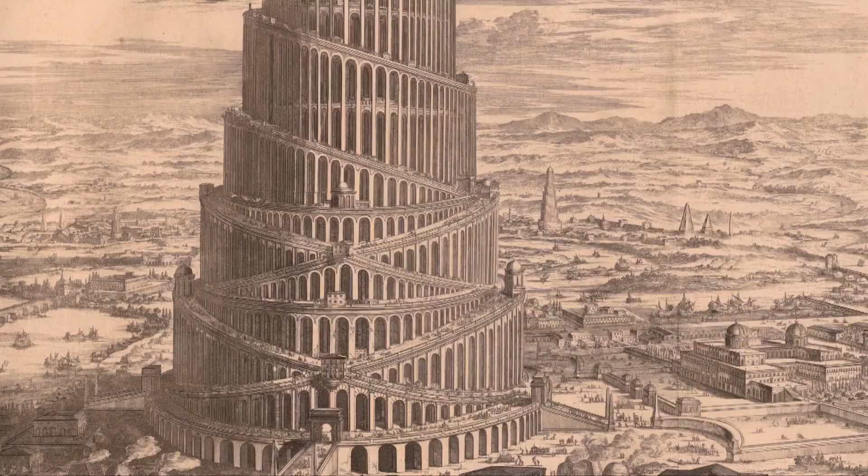Today, the world has 3 mega skyscrapers reaching over 600 meters, physical representations of man's eternal desire to conquer the sky. From the Tower of Babel to the Burj Khalifa in Dubai, the creation of high-rise constructions has been unceasing.

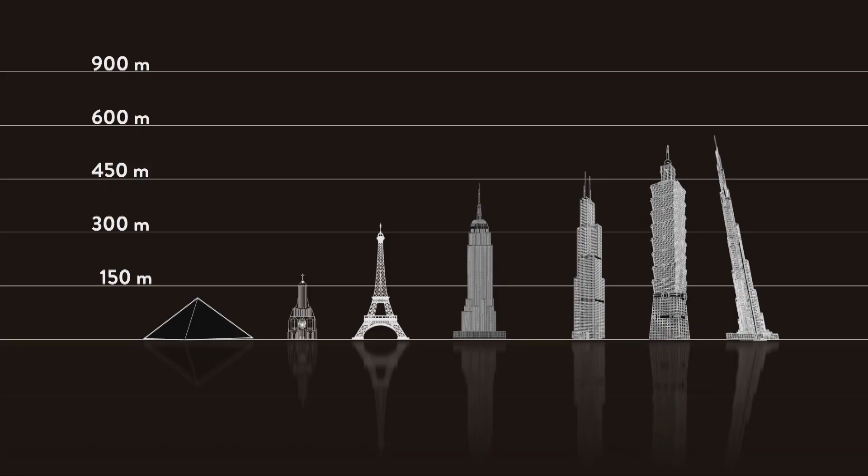Richard Taillé is a physicist. He went around the world to research the subject, asking the expertise of engineers and scientists driven by their desire to reach for the sky. How were the Egyptians able to build pyramids that dominated the world for nearly 4 millennia? What were the methods of cathedral builders? How did engineers make use of scientific models to design emblematic monuments?

Richard Taillé takes us on a vertical journey in the footsteps of those who set out to conquer the sky. To understand how over the centuries men have been able to defy and then master the laws of physics as they build higher and higher. His investigation of man's race for elevation took Richard Taillé to Egypt.

At the edge of Cairo, on the Giza Plateau, stand the pyramids. The Pyramid of Khufu, the largest, remained the tallest structure in the world for nearly 4 millennia. What expertise was available to the Egyptians when they built these monuments? It's a mystery that continues to fascinate scientists and Egyptologists such as Pierre Tallet. With him, Richard Taillé visited the pyramids, the last remaining monument of the 7 wonders of the world.

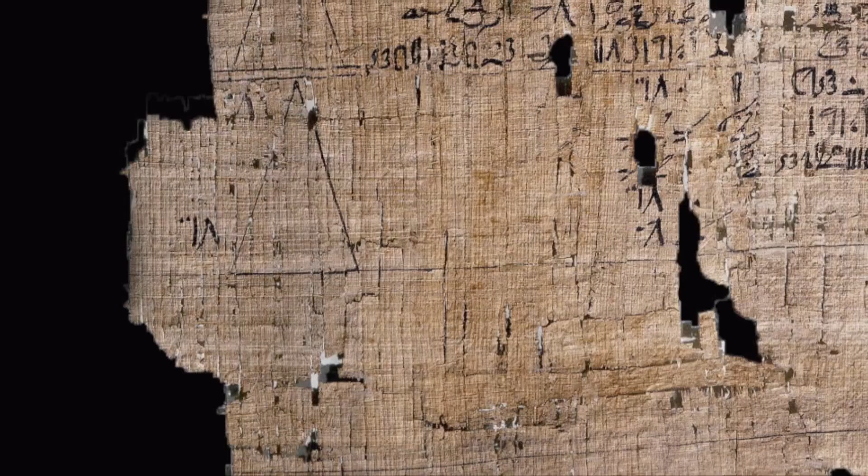Thanks to the Rhind papyrus, we understand how the Egyptians were able to build the pyramids so that their slopes were identical. We know that the Egyptians had the idea of proportion and used a small triangle. Using that small triangle told them where to place the next stone. The small triangle and the pyramid were similar triangles, as we say today. And this similarity is found in all of the pyramid slopes.

How can we not wonder what methods were used to build these colossal stone constructions? From the foot of the pyramid, we can really see the blocks. I mean, they're huge. People have an image in their head of armies of slaves working on the pyramids. Is this impression correct? Not really. Certain films have popularized the idea of slave people working on pyramids. Nothing is further from reality.

The more documents we find, the more we realize that the work was remarkably well organized by the Egyptian monarchy, and that the workers were craftsmen chosen by the king. They were well fed, well paid, and employed on a yearly basis for their skills. And according to the American archaeologist Mark Lehner, since it took 2.3 million blocks to build the Pyramid of Khufu, we can estimate that they made an average of 350 blocks a day over the 27 years of Khufu's reign.

A team of 800 men is capable, over such a long period, 27 years, of carving all the blocks that made up the pyramid. By making these extrapolations, we've concluded that a team of about 5,000 at the most would have been perfectly sufficient to construct the entire building. Okay, that's still quite a large team.

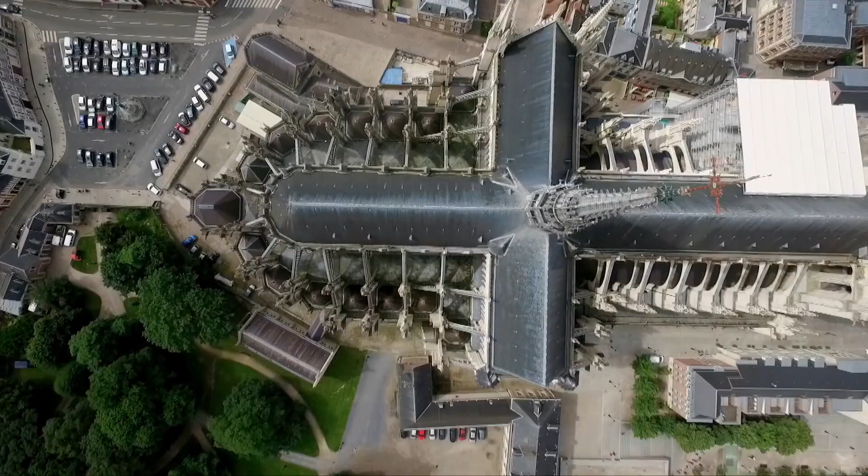Notre-Dame d'Amiens was a wildly ambitious project, unrivaled at the time. One that holds great fascination for Richard Taillé. As a physicist, when I see the columns, the mass that is above us, I try to reason in terms of force and mechanics. But I imagine that in the 13th century, these notions were not very well known. Exactly what kind of theoretical tools did they have at the time for constructing these cathedrals? In terms of theoretical tools, they didn't have much. Mastery of the compass, the set square, the ruler, very good drafting methods, and the right materials. They used the right stone in the right place.

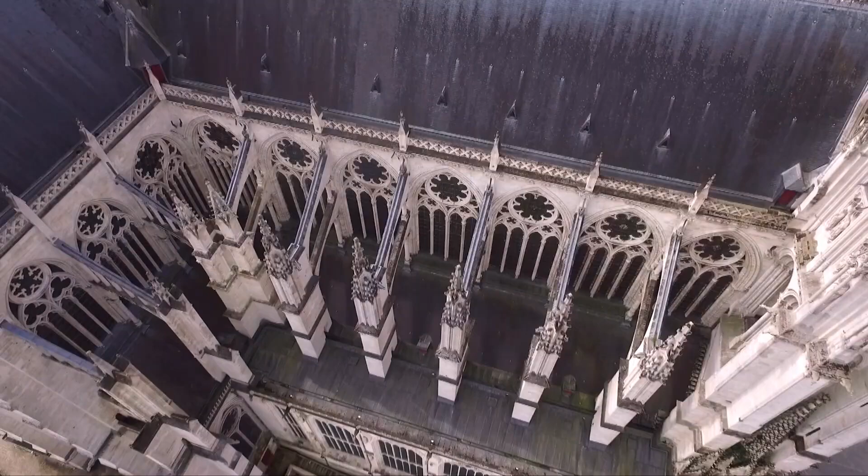Empirically? Very empirically. Just by weighing a stone, they knew its density. And they put the heaviest stones on the bottom, the lighter ones on the top. When we make sophisticated calculations today, we realize that these structures are oversized from today's viewpoint because they didn't calculate the size at all. But pillars like this could bear maybe 20 or 30 times the load they currently carry. Few or no theoretical tools. As for the construction tools like the plumb line or the arithmetic rope, they remain astonishingly simple in light of the scale and the complexity of these stone constructions.

Well, let's try one of these so-called rudimentary tools. We're going to make a right angle with this rope that has 13 knots. 13 knots. We're going to make a triangle with one side, that's 3 units, 1, 2, 3. 4 units here, 1, 2, 3, 4. So if we calculate this on paper using geometry, a triangle with these proportions should have a right angle here. It's the Pythagorean theorem, but the medieval constructors didn't know this theorem. However, they knew that when a triangle has one side that's 3 units, another 4, and another 5, it's a right triangle. So that gives us a right angle.

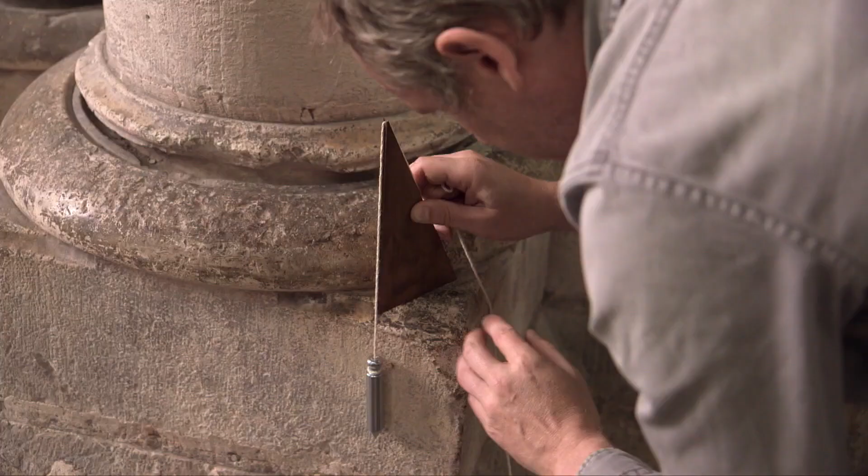And it can also help to make horizontal lines. If the vertical line here is aligned with this side, it means that the bottom is horizontal. Yes. Let's try. I'm a little intimidated. It's my first time using this medieval tool. Here we go. I'm putting it on the surface. And yes, it's horizontal. It's remarkable. So I tested the horizontality of this part of the cathedral. The builders did a good job. We can see that they managed to build something massive and durable using a relatively simple tool. And that 800 years later, with maintenance, it has remained sound.

But not all cathedrals have been so lucky. A few kilometers away, Saint-Pierre-de-Beauvais has had a turbulent history. It should have been the highest cathedral in the world, but the builders' plans were foiled by the laws of physics, leaving it unfinished. Jean-Lucien Guenon is the heritage officer who watches over it today.

So we're entering the cathedral at what should have been the main entrance if the nave had been built. And we can see the size of the aisle and the choir with its Gothic architecture in front of us. The Bishop of Beauvais, who decided to rebuild the cathedral in 1225, wanted it to be the most magnificent, tallest, and largest cathedral in Christendom. So the vault is 48 meters 50 high, the tallest vault ever built.

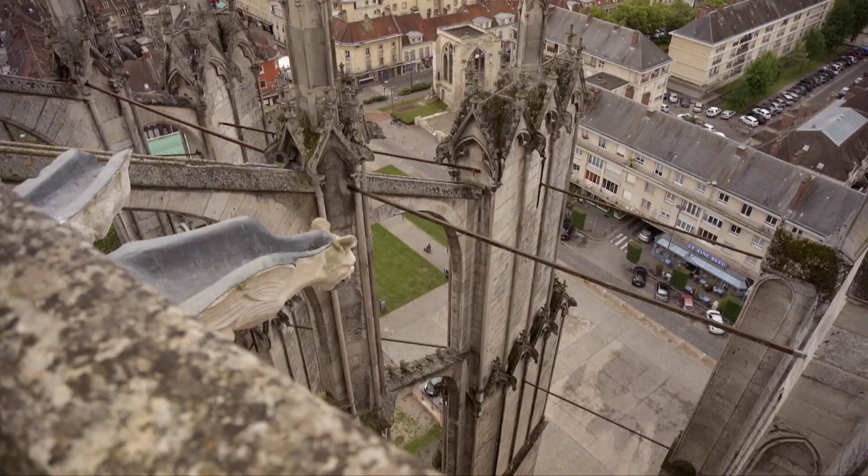At the time, Saint-Pierre-de-Beauvais benefited from advanced technology. It was reinforced with iron. Its arches were supported and bound together with metal tie rods, but this precaution would prove insufficient.

The choir suffered some unforeseen events. It was completed in 1270, after 50 years of construction. And in 1284, some external flying buttresses broke, causing certain arches to fall. It didn't completely collapse, but nevertheless, as a precaution, the reconstruction included a new column in each span.

And that's why it's a very small space. So 3 new columns were added, in between the 13th century columns. All right. Each arch is therefore divided in 2 and supported by an additional column.

We're going to see the upper parts of the church now and look at the tie rods more closely. The stairs are very steep. Here we are. Okay.

We have a good view here of the cathedral's 13th century architecture and the differences between the original structure and the reconstruction that took place in the 14th century. So we can see this buttress column that is very streamlined, but has a large surface area for the wind. And then a column here in a cruciform shape that's a little less wide but offers protection in this direction.

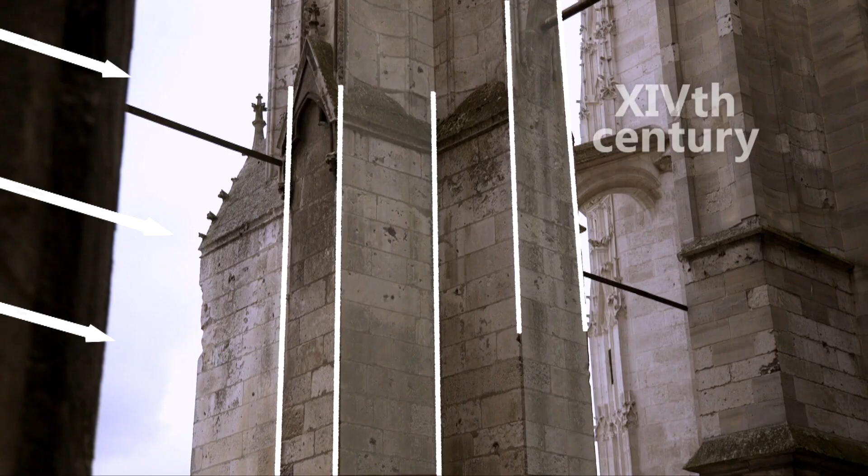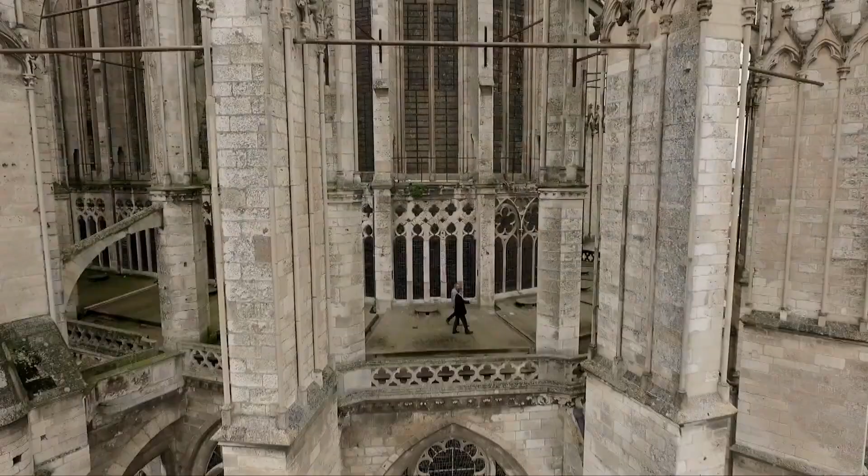It's really reinforced in all directions. So more solid, less wind vulnerability, more stable. Yes, more stable. And if we move forward, we see the structure of the tie rods. They're iron bars that crisscross. They're iron bars that connect everything so that the structure is held together if there's movement. Okay, it keeps everything in place. The continuity of the chain is the important thing. One wouldn't be enough.

The evolution of Gothic architecture, with its unprecedented successes and spectacular catastrophes, is studied in many universities, including the United States. Richard Taille headed to New York. He went to meet with researchers from Columbia University who are studying French cathedrals using modern scientific tools and have created an index of all of them.

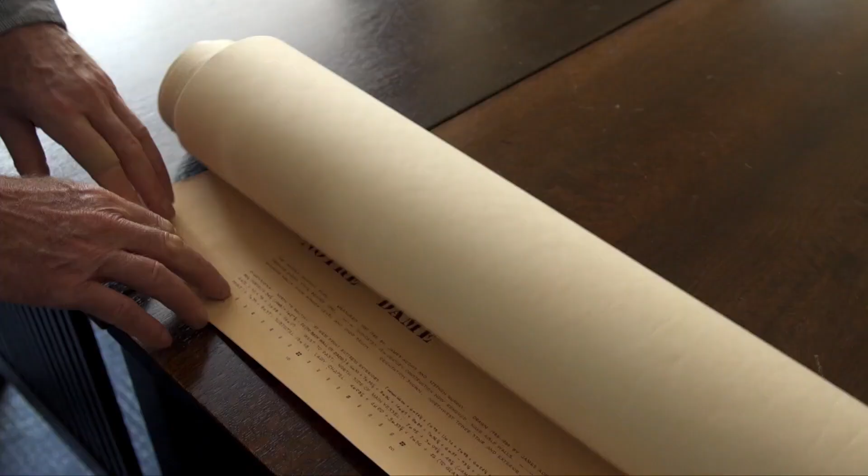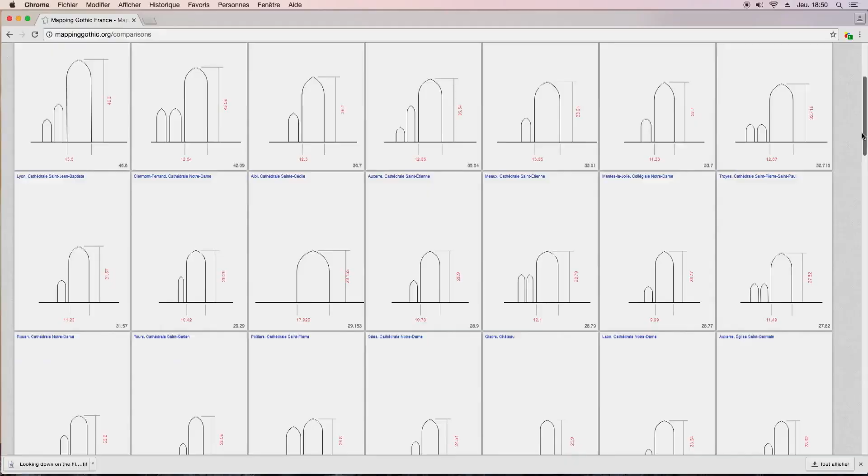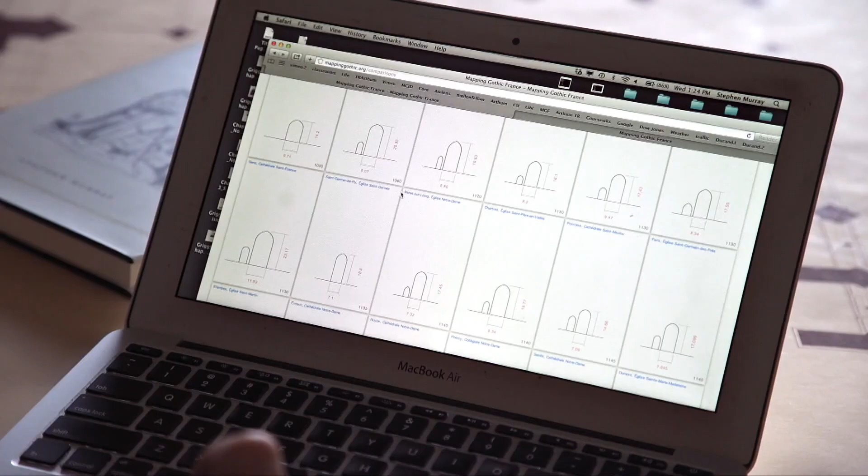Stephen Murray and Rory O'Neill have developed digital tools to better understand Gothic architecture, first off with a huge database called Mapping Gothic. What's particularly interesting is here that it's arranged by nave height, but we can also arrange by approximate construction start. Okay, this shows the height. So here we are in the year 1000. One can look at the heights of building changing, and you don't see a huge amount of difference in them.

The great breakthrough of all the cathedrals is Notre-Dame de Paris, and it was the first building in Northern Europe that goes beyond 100 feet in height. Amiens, 1220, and here comes Beauvais, 1225. Why did it happen at that particular moment? I would suggest the answer is not simple.

What you're dealing with is a period when the clergy, the bishop, are receiving huge amounts of money from agrarian production and industrial production in the cities and mercantile exchange. So to make a building very tall like Amiens or Beauvais, in other words, the technology was possible only because they had the resources to do it.

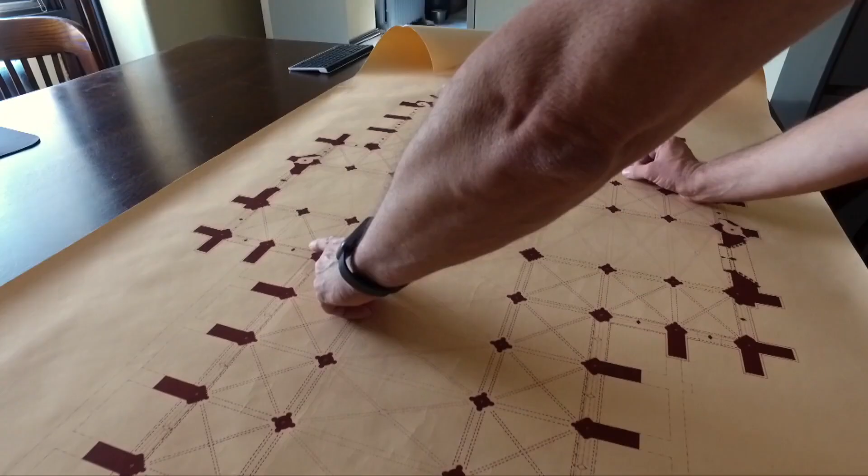To experience in real time the challenges of the cathedral builders, Rory O'Neill developed a digital simulation, a sort of scientific construction game. Yeah, the relevance here is to build an appreciation, an intuitive sense of what the builders were challenged with. They wouldn't be sure of how the blocks would behave until they put them up there. And so we can put them up there more quickly in this simulation because each block is behaving as it would. So we have the ability to vary the sizes of the blocks and their configuration in real time.

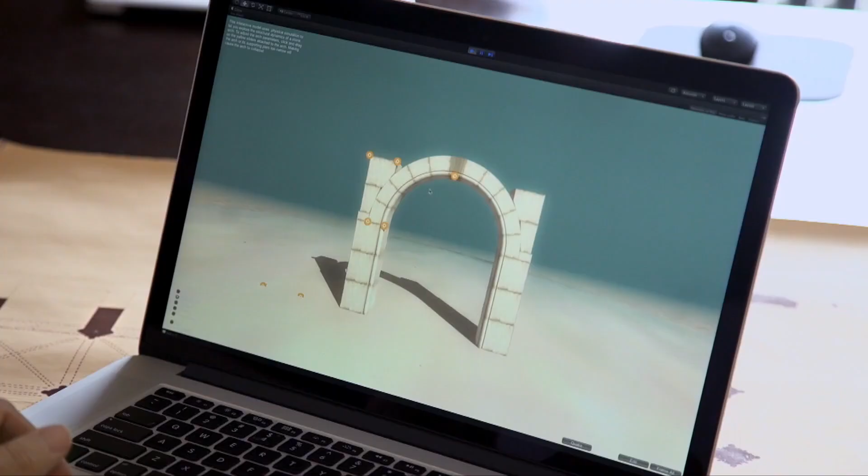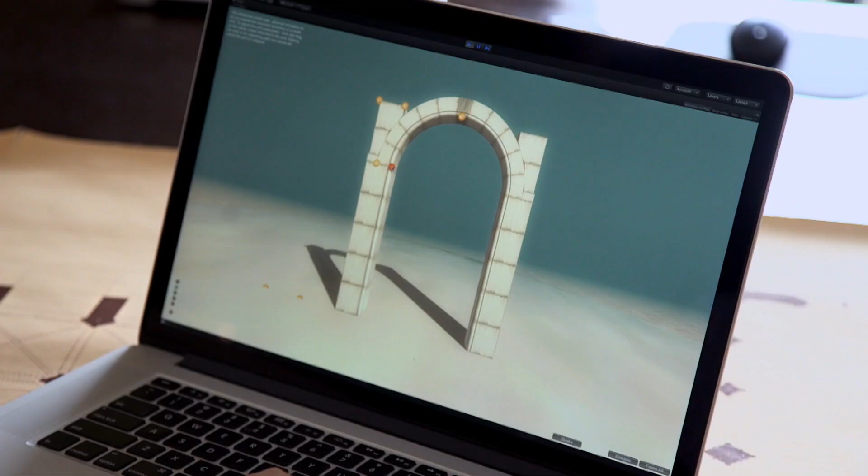As we try to make this structure taller, we've got the same outward force with this trying to fall and pushing these out, but because these are taller, it's got more leverage to push these things apart. Okay. And so height, the quest for height here, is limited to some extent by the ability to vault the space. So what we can do is certainly add more support on the sides, more buttressing. This holds? And this holds.

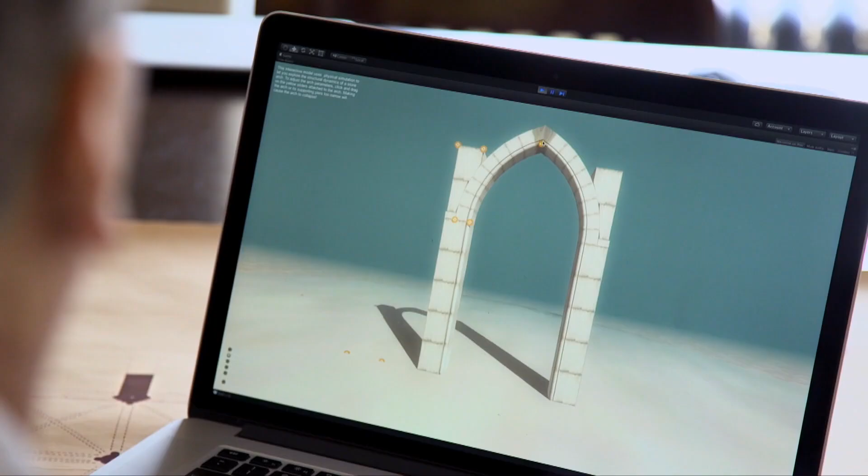Okay. But this is expensive. Here we've got a lot more stone that has to be quarried. It has to be brought too. Well, somewhere in Islamic builders came upon the idea of breaking the arch. A broken arch, an arc brisé. Arc brisé, d'accord. And whether or not this was done for aesthetic reasons or structural reasons, we don't know. However, it does help.

Yeah, it works. Because it's bringing the load more directly to the ground. And certainly, because of the structural benefits, we can start going a little higher and try to make this taller and taller. At some point, this will also fail. So everybody stand back. So here we've got a failure of the structure in static loading.

But as we get larger to hold more congregants, a growing city, we need to come up with some other solution here, what we know as flying buttresses. So I think maybe even you could give it a try. OK, let's go. It's Richard's turn to try his hand at cathedral building and to experience the humbling challenges of the quest for height.

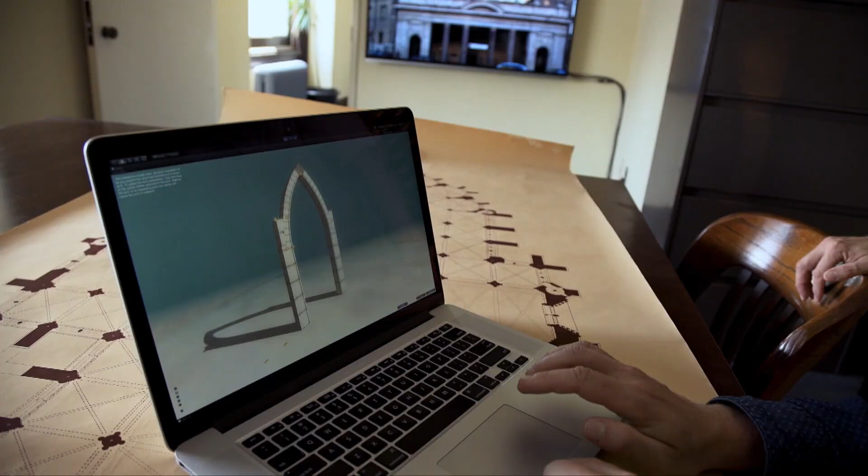I don't want to brag, but mine's holding. Oh là. OK. I spoke too quickly. It didn't last very long.

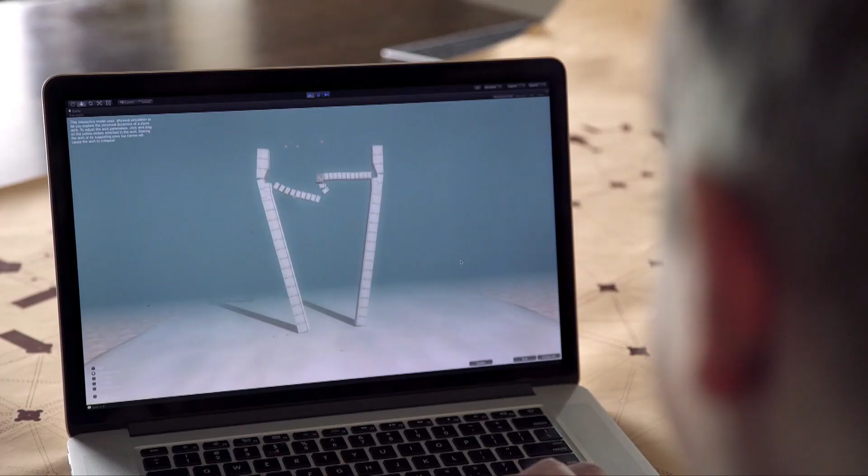Even seismic engineers today are still learning from these masonry structures because their simulations are not as accurate as the buildings themselves. So for the most part, seismic engineers are looking at these medieval masonry buildings to learn how to build better today.

For several centuries, the race for height remained the domain of the sacred. The highest cathedrals in the world, Ulm at 161 meters and Cologne at 157 meters, both in Germany, would only be completed in the 19th century. At the beginning of the Industrial Revolution, the concept of technical prowess surpassed that of religious will, giving new momentum to the conquest for the sky.

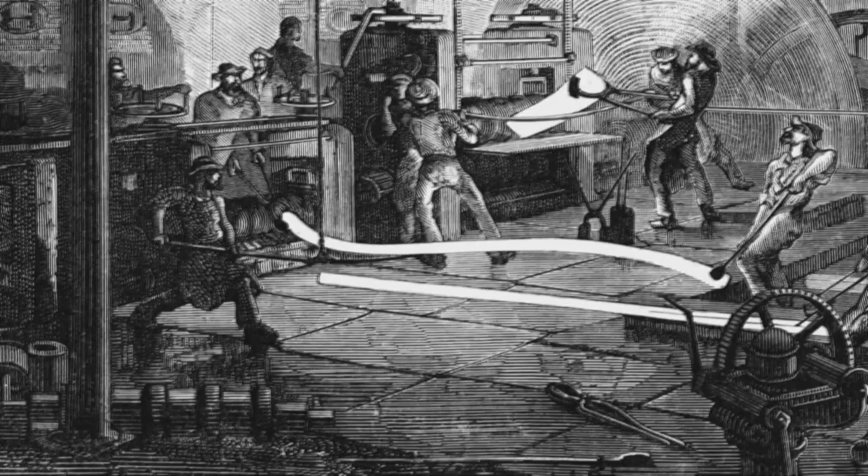The engineers performed what were miracles for that time, exploiting new materials. The steel industry was rapidly developing. First iron and cast iron, then steel, would become the primary metals used in construction. Soon, the first skyscrapers were born, thanks to a tragic incident.

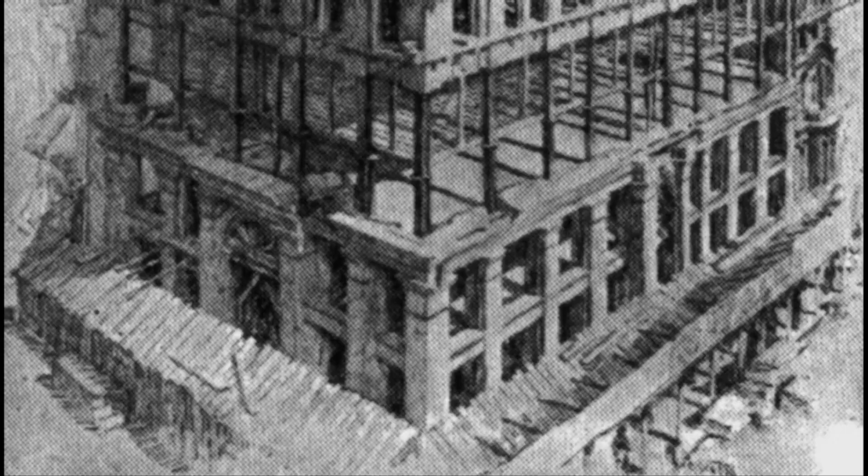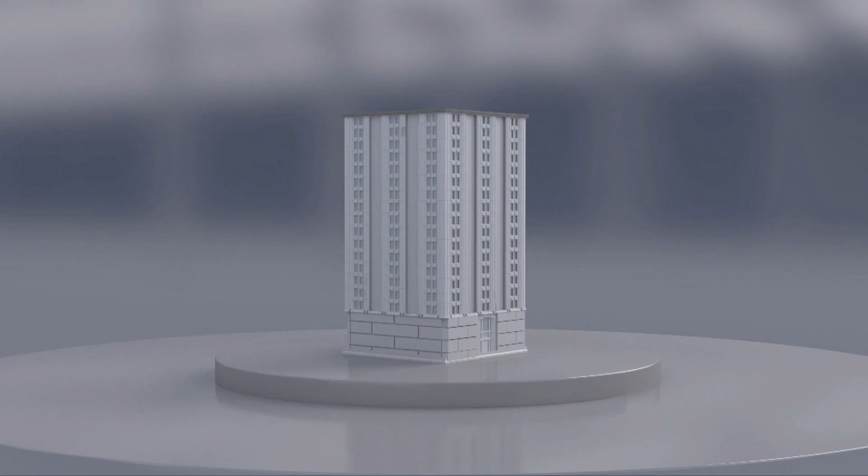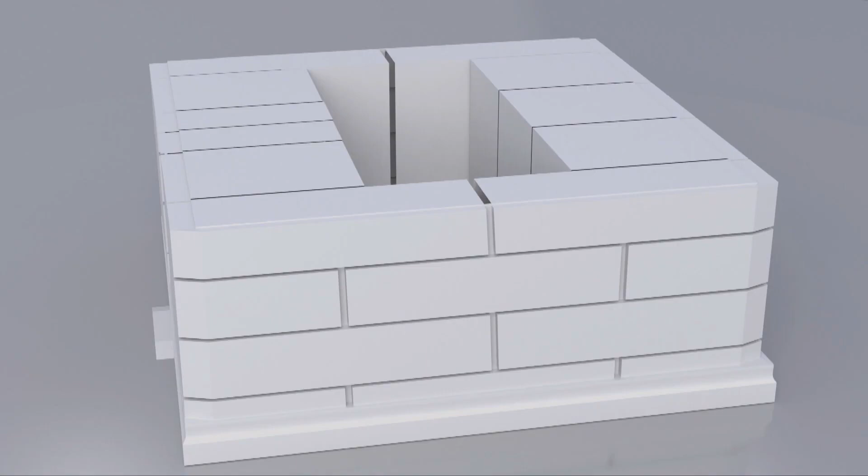And so the first skyscraper was born, the Home Insurance Building, designed by the architect William LeBaron Jenney. He said that his goal was a height to rival the Tower of Babel. But apart from the height, it was the construction technique that was truly innovative. In traditional masonry, the load of the structure is supported by the walls. The more height, the greater the forces that are exerted. Hence the need to build thick walls. For example, a 16-story building in Chicago has walls that are 1.8 meters thick at its base.

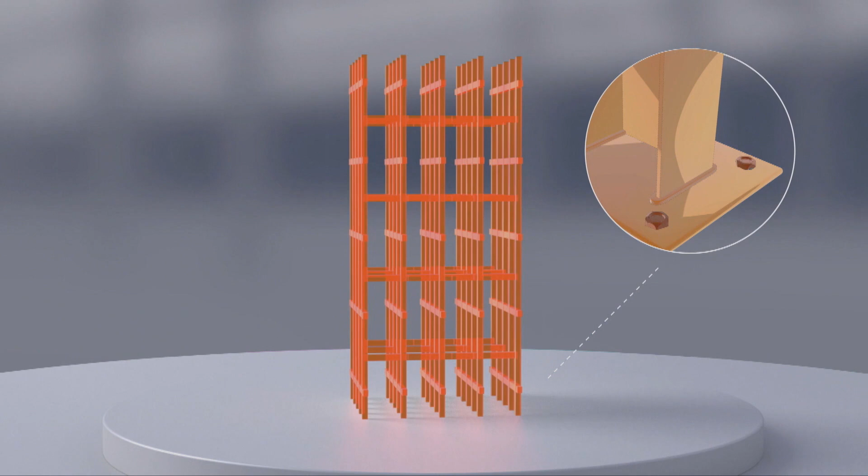But thanks to the invention of the metallic structure, buildings were able to become lighter and therefore higher. Traditional masonry was replaced by a skeleton of metal girders with the framework connected by rivets. This supports the weight of the building and allows the entire structure to be lightened considerably. Thanks to this new technique, man would be able to set new records in its conquest of height. There was much new terrain to conquer, and soon a rivalry began in the United States.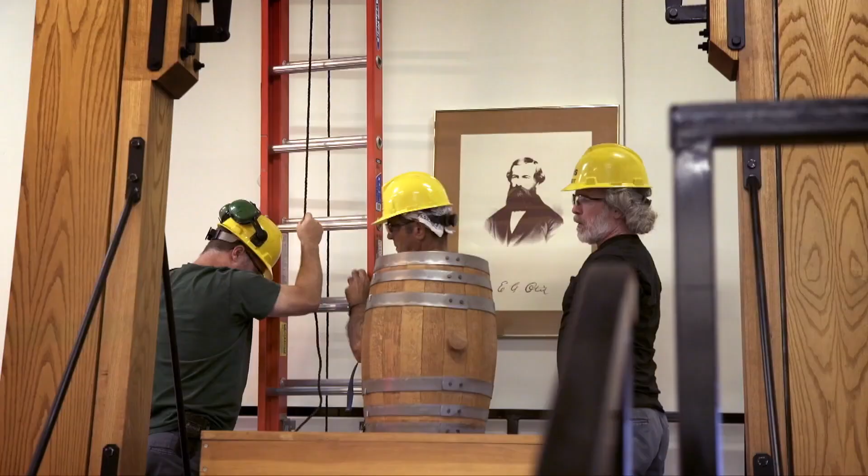None of this would have been possible without a crucial invention, the elevator. Elisha Otis, an engineer, made the discovery around 1850. Here it is, the test tower. To find out just how revolutionary his methods were, Richard Taillé went to the Otis Research Center in Connecticut, where he had a historical experience. 28th floor.

Welcome. Bonjour, merci. Richard. I am Rick. Okay. You'll need to wear a hard hat, safety glasses. How do I look? You look wonderful.

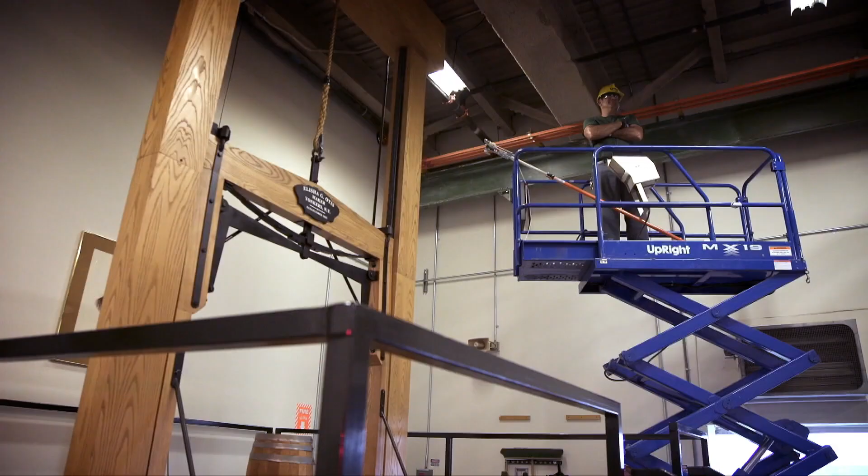Well, I didn't expect to see a wooden device like this here in the middle of this big tower. So that's actually an elevator. This is an actual lift. In 1853, elevators were used for freight goods. And if the rope broke, the platform with the goods would fall, damaging the materials being manufactured. Elisha Otis, who was the building engineer, said there has to be a better way. How can we prevent the platform from falling?

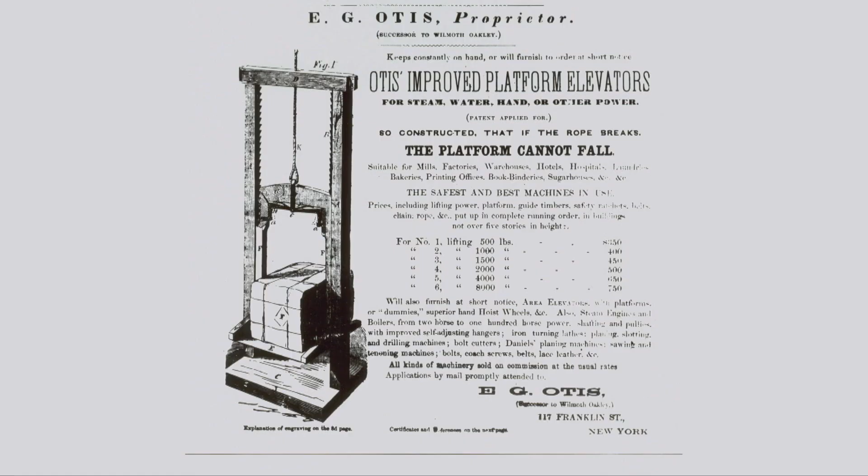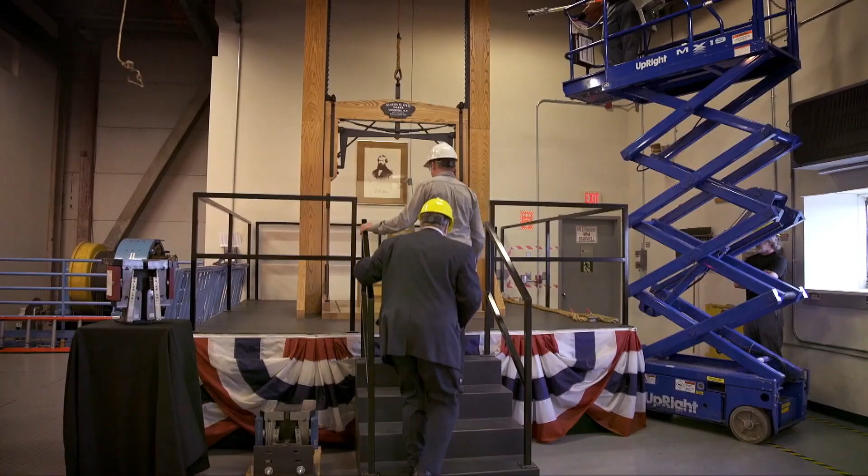So if you look here, you can see the spring. That came from a wagon. Okay, so he took something that already existed, the mechanism that has been used in trains. Yes. And what he developed was an ability to stop immediately the platform falling down if the rope broke. Would you like to try? Yeah, let's go. Here? There you go. Okay. So let's raise the platform. Right, so that's pulled these two in.

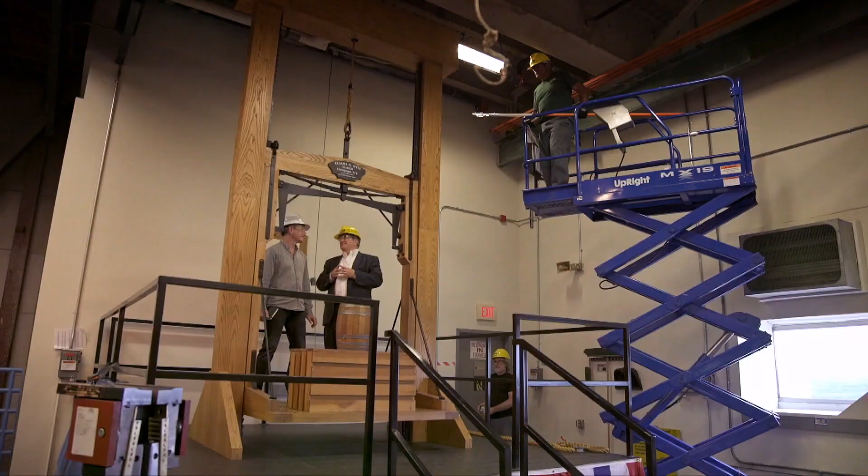Okay, here we are. We say cut the rope. The tension will be released. It'll push the pawls into the ratchets, and we're going to come to an immediate stop. 3, 2, 1. Cut the rope.

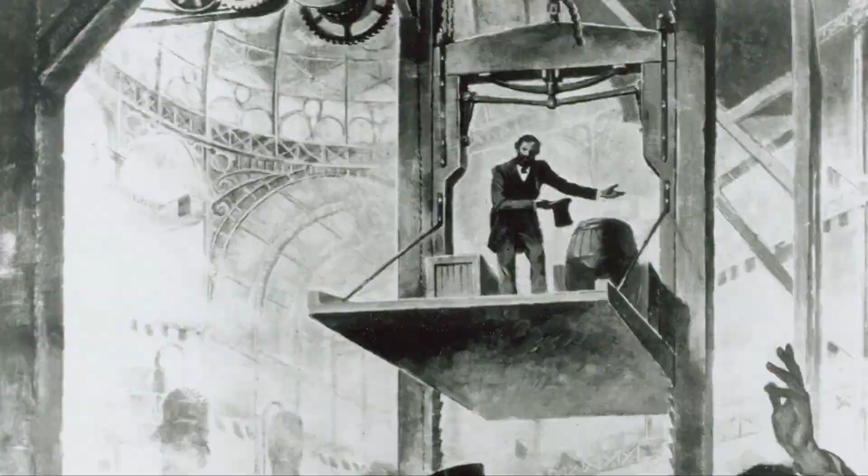4 years after this impressive demonstration, the first passengers would confidently ride in the elevator that Elisha Otis installed in New York. Elevators remain the subject of intense research today, but they have allowed, since their invention, the true conquest of the sky to begin. A bitter competition where science clashes with pride.

Five years before the World's Fair, which was to mark the centenary of the French Revolution, Gustave Eiffel and his engineers had the idea for a 300-meter tower that would represent the country's rediscovered power and demonstrate its technical prowess.

Hello, Monsieur Lemoine. Hello, Richard. It's nice to meet you.

Likewise. So you're a specialist of the Iron Lady. Here's this beautiful tower shining under a blue sky on this clear and sunny day, which brings out its graphic lines, its lightness. The structure is 300 meters high, making it the tallest building in the world when it was built in 1889. It was really a visible marker of the technical and scientific accomplishment of the 19th century.

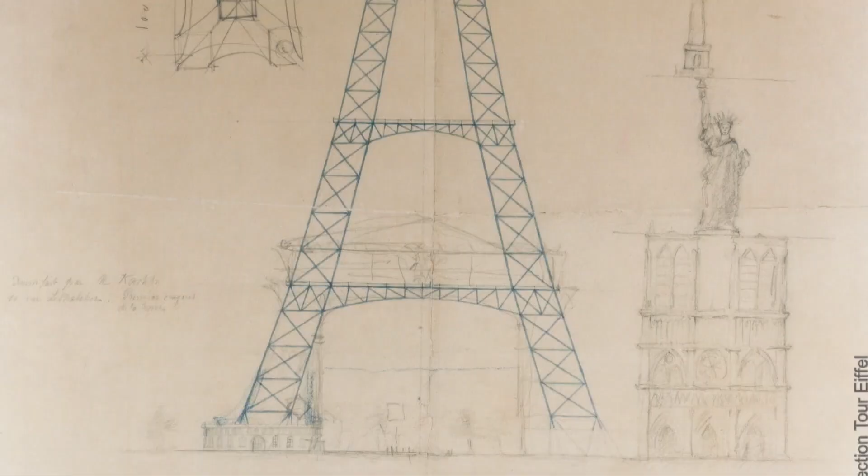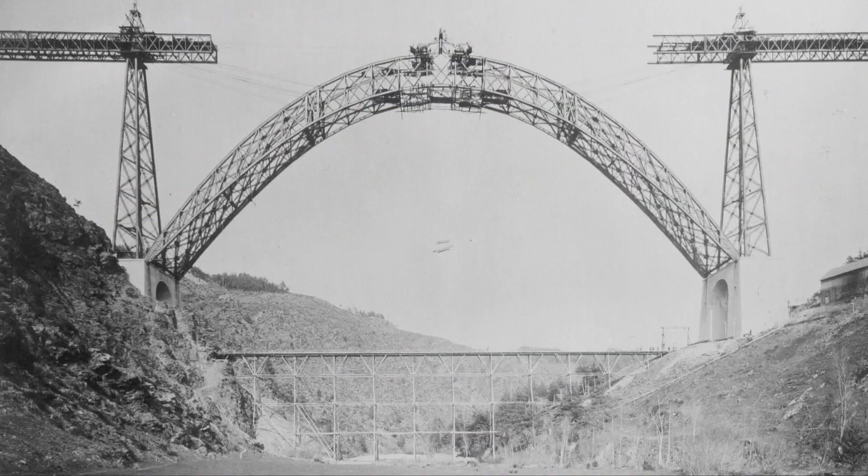And how was the Eiffel Tower designed? Was it an idea that came from Eiffel? Or was it a commission made for the exhibition? The tower was conceived by two engineers, Émile Nouguier and Maurice Koechlin, who brought the idea for a 300-meter tower to Eiffel in 1884, based on the bridge columns that the company already knew how to build. This would, of course, be both the highlight of the Universal Exhibition of 1889 and also the great achievement of his career.

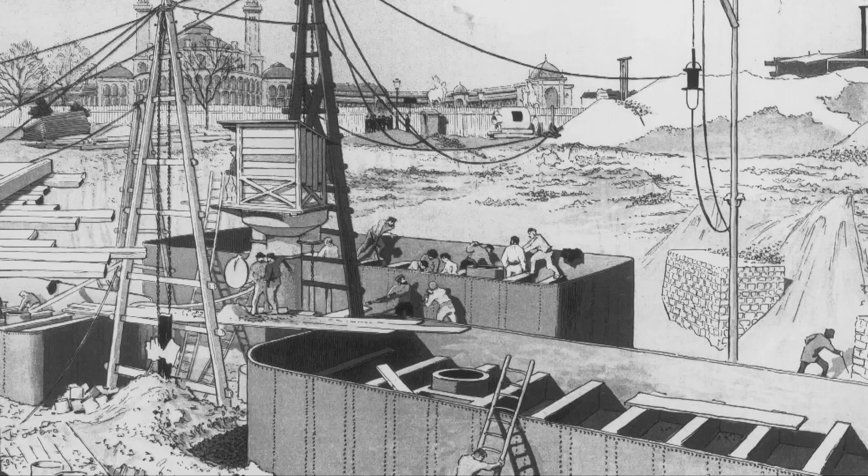So now we're at the square under the columns. We can see that they're leaning inwards. How did it stand up before the first floor was built? The challenge was to start the tower. They began by building foundations, and then the slanted columns. To hold them up, they just used wooden scaffolds, the same that were used when building cathedrals. They started with 4 columns, and it rose from there. The critical point was reaching the platform area on the first floor.

We shouldn't forget that they were assembling sheets of metal pierced with holes, which had to be adjusted precisely before putting in the nails, down to the millimeter. From there, it was a kind of giant meccano that could be gradually assembled. In less than 2 years, the tower was built, to everyone's surprise. Let's go and take a look from above. Let's go up.

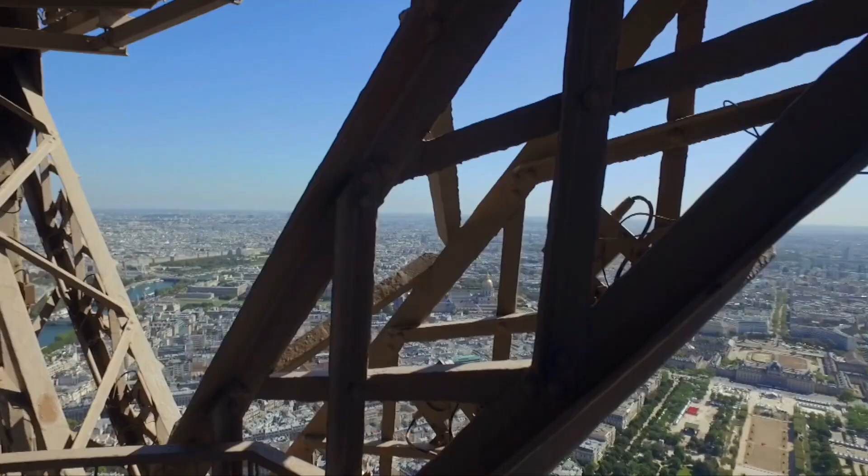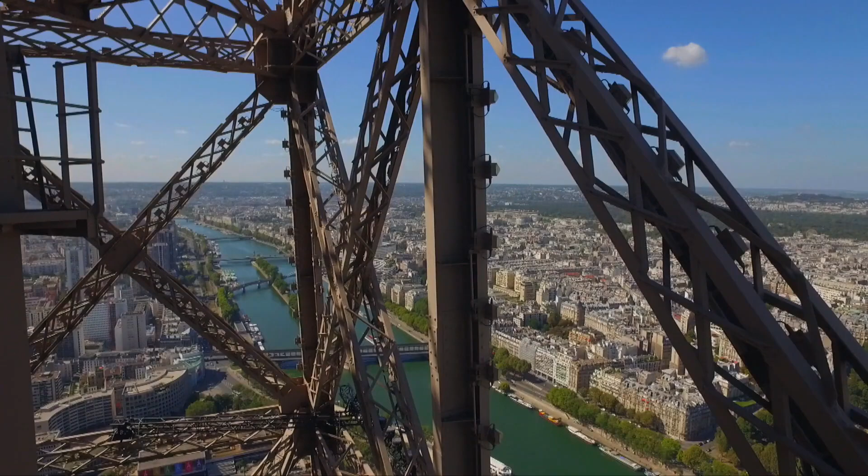Here we see the structure really well. A view of a void. We're in between the second and third floor, about 250 meters high, and we see that there's not much holding the top of the tower. There are open-work girders. In total, the tower weighs 7,300 tons. It's very lightweight for a structure of 300 meters. But it has been strategically designed to withstand the wind.

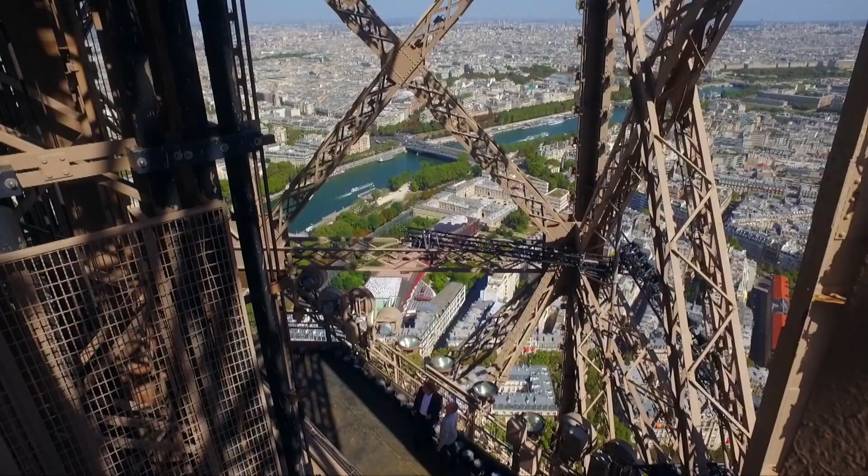The wind creates pressure, several hundred kilos per square meter, which could topple the tower. So they gave it a slightly curved form, which causes the horizontal force of the wind to combine with the vertical force of the tower's weight, giving a resulting force exactly in the axis of the columns. So the shape doesn't come from the architect's imagination, but from a mathematical calculation. The shape comes from mathematics, but that's what gives the tower its visual identity, precisely because it's inspired by scientific studies and not by the classic rules of architectural composition. Okay.

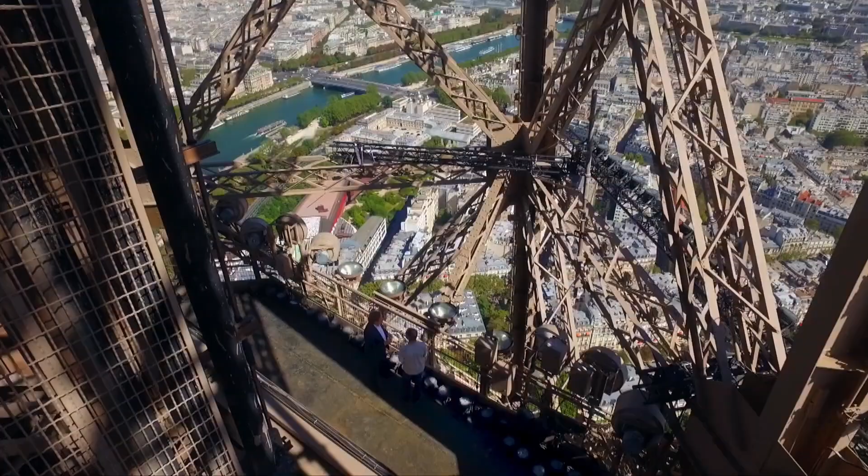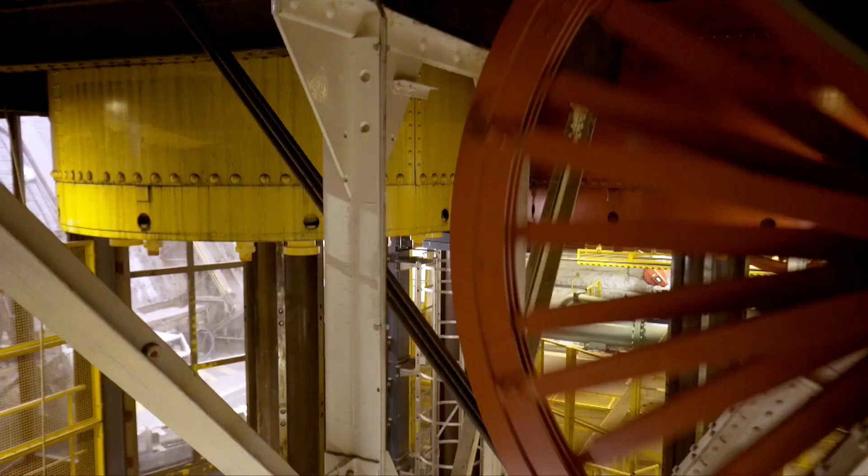From June 1889, visitors to the tower could safely reach the top thanks to elevators, a real technical feat at the time. Here we go, we're going all the way to the top, from the second to the third floor. We have an incredible panoramic view from here. For 40 kilometers away, it is stunning.

So in 1889, Parisians could come here and see the very same view. For the first time, they had the chance to go up 300 meters in the sky, and it was a real novelty. And it wasn't just a small group of people who came, but 2 million people. And they weren't afraid to climb to the top of this great iron tower? It was a very unusual opportunity. They weren't familiar with mountains or altitude.

A lot of people must have had vertigo, but it was also perhaps a way of warding off their fear, saying to themselves, I'm 300 meters high and I'm safe on this small platform. It showed that one believed in the idea of progress, which was strongly valued at the time by all of the citizens. In any case, I feel safe on this platform. No problem. I'm not afraid of falling.

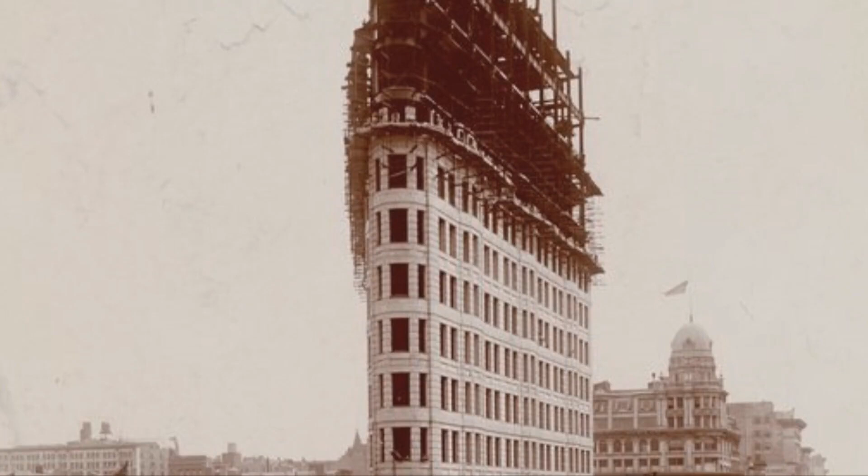From the early 20th century, every bank, newspaper, and insurance company wanted its own skyscraper. It was a way of gaining exposure for their brand and asserting their reputation with a powerful symbol. Buildings of greater and greater heights sprung from the ground until one of them came to dominate the world for quite some time. We're on Fifth Avenue, 34th Street is here, and right up there is the Empire State Building, the projected world tallest building for many decades.

Wow, what a beautiful lobby. And what about this picture here? Now, this is wonderful. A big image of the building itself. There it is. A building that sets back under the zoning law of 1916 in a very dramatic fashion. In 1916, after 20 years of people arguing about how big these buildings are, New York City passed a zoning law which basically says that the building starts with a base, sets back at a certain mathematical formula, goes up, and allows people to still be bathed in light and not feel that they're down in an elevator shaft.

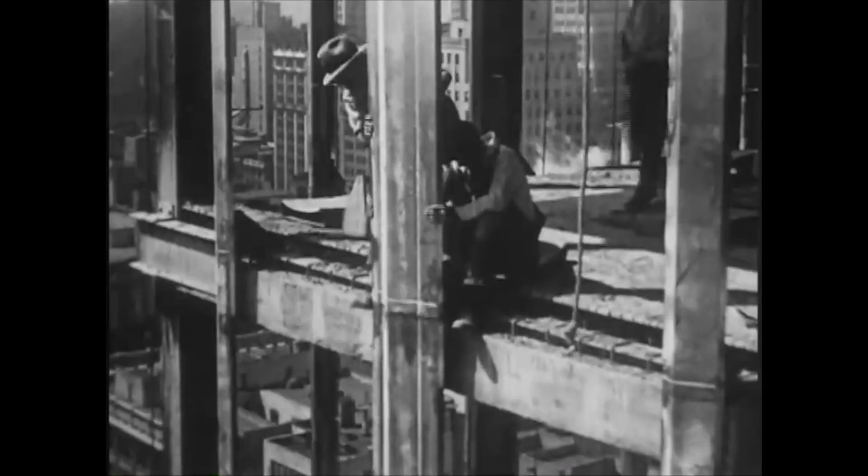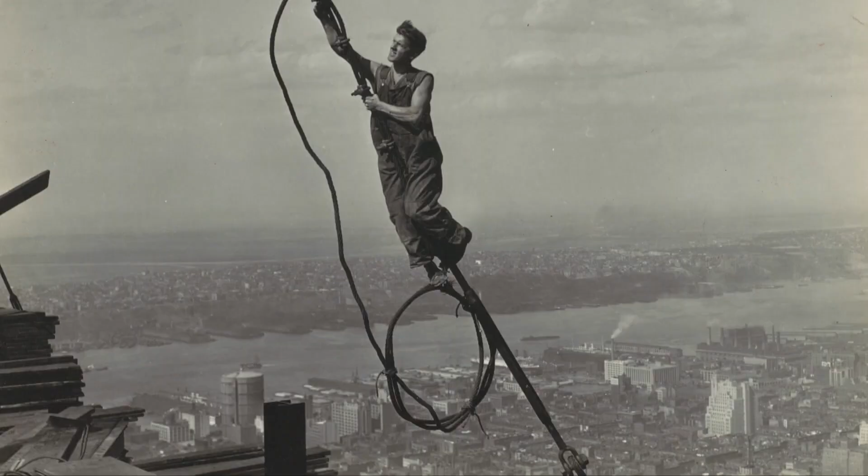The Empire State Building, with its distinctive silhouette, is the ultimate model of the 1916 law. And it was built at the frantic pace of 4.5 floors per week. It was a construction nightmare. And you know, it involved riveting huge girders in the middle of the sky, looking out on nothing. Now, I don't know whether you've ever seen the... Oh, pictures of the construction workers. The thought of it terrifies me. But the special people who do it are Mohawk Indians from Canada, and they were able to get out on those girders and do it.

And this building was finished in 13 months. It was finished May 1st, the traditional moving day in New York City. The building was ready on May Day. 1931, the building flopped. That initial commercial failure did not, however, prevent the 381-meter-high Empire State Building from remaining the tallest skyscraper in the world for 4 decades.

One of the defining features of the Empire State Building is that it is mainly constructed from concrete, a 19th century innovation that gradually came to replace brick and terracotta. This material made it possible to reach heights that were unimaginable even a few years prior. Along with steel, concrete remains the primary material used in the construction of high-rise buildings today.

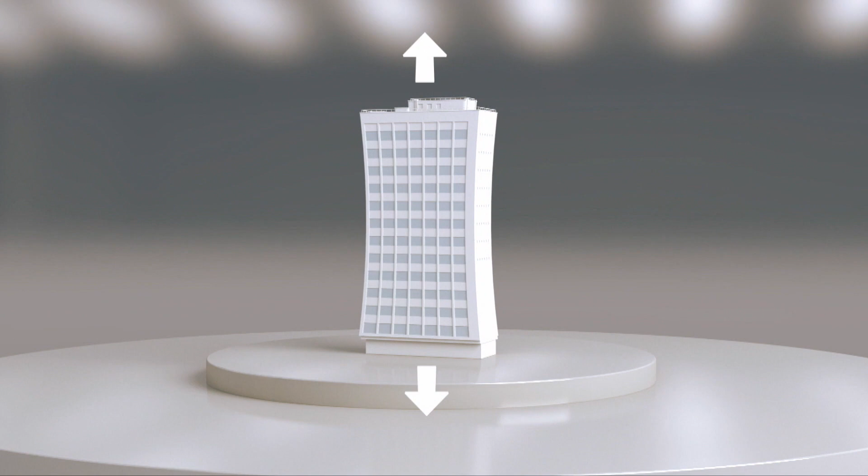The higher a tower rises, the more it is subject to external forces, compression, traction, bending, twisting, and shearing, exerted mostly by the weight of the structure on itself or by winds exceeding 200 kilometers per hour. When subject to pressures that are too great, towers can bend to one side, swinging back and forth, twist in on themselves, and end up collapsing. So they have to be constructed with materials that can absorb these movements.

When used alone, concrete has considerable compression strength, but its tensile strength is low. Steel is very resistant to traction and compression. Its physical and mechanical characteristics are the same in all directions. It twists elastically until it breaks, predictably, always under the same conditions. Manufacturers had the idea of adding reinforcements to concrete in order to give it flexion strength, so the tensile forces would be carried by the framework. Thus, reinforced concrete was born.

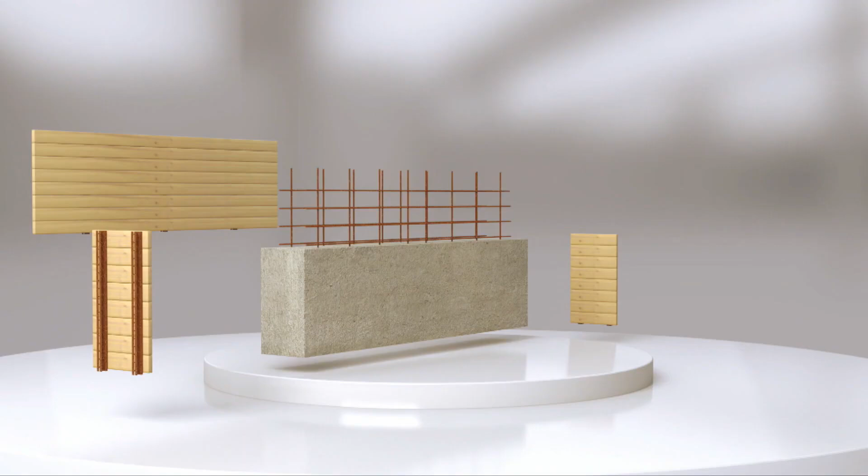To make it, concrete is poured directly into molds containing steel bars. The latter support the concrete and allow it to effectively withstand the forces that act upon it. Thanks to the advances made in the strength of concrete and also lighter materials and increasingly efficient engineering, the race for height gained new momentum in the 60s.

The United States popularized the skyscraper, but the records they set were soon surpassed by Asia and the Middle East. In Asia, Shanghai, Singapore, Taiwan, and Kuala Lumpur, new high-rises were erected each day, with Hong Kong holding the record with over 1,250 skyscrapers. New records were constantly being set. The number of skyscrapers grew exponentially.

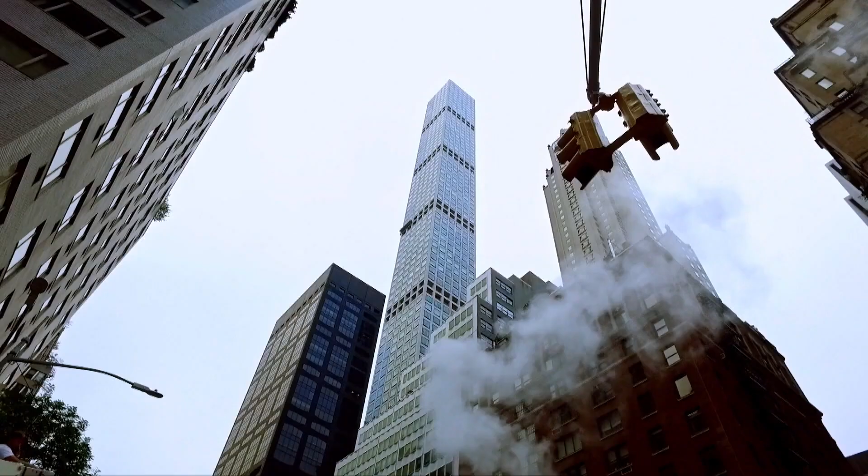It took 135 years to develop 50 super tall buildings. And super tall we define as 300 meters or above. And then the next 50 super tall buildings happened in less than a decade. So the pace of development is absolutely rapid and massive.

However, we were seeing such extremes of height that super tall no longer caught the essence of the extreme heights that we were seeing being proposed. So that's why we introduced the term megatall, which is 600 meters and above. And right now there are 3 megatall buildings complete around the world.

The final step of his investigation led Richard Taillet to Dubai. Here he visited the tallest building ever made by man, the Burj Khalifa. 828 meters of concrete, steel, and glass, built in just 6 years. What scientific model did the engineers use to design this emblematic monument, this showcase of modern science? Richard Taillet received special permission to witness the internal workings of the skyscraper, to discover its secrets.

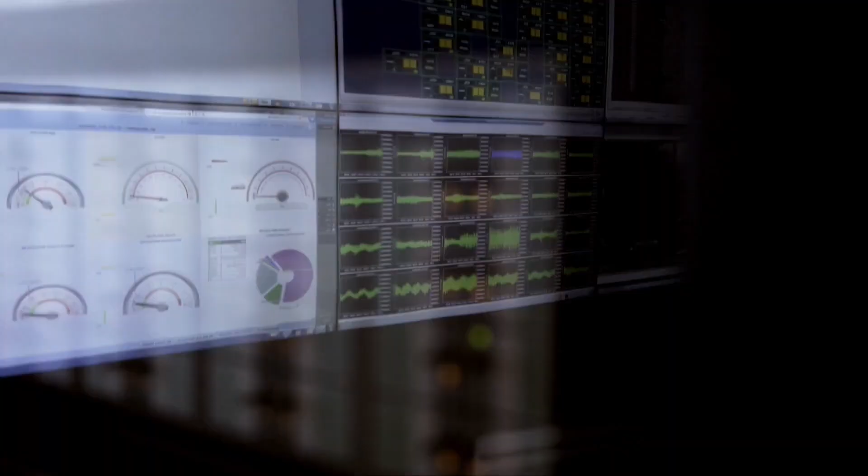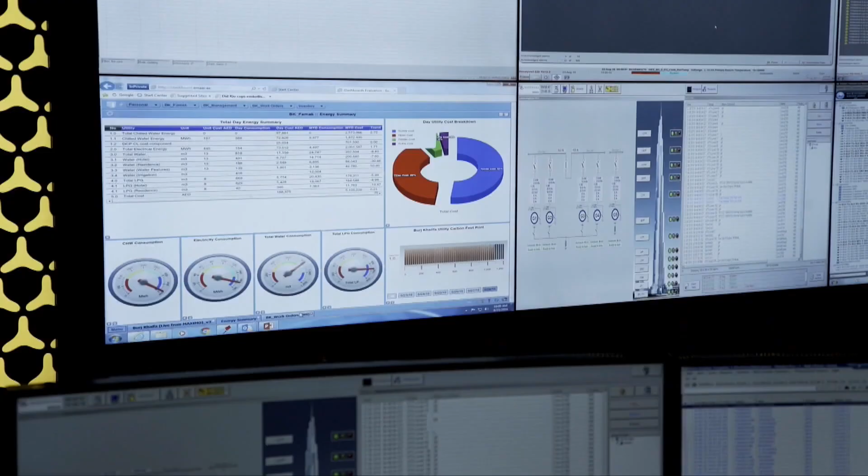The highest skyscraper in the world is truly at the forefront of technology. It is permanently under surveillance from an underground control room that Richard Taillet visited. This is the brain of our building. The brain, okay, le cerveau. From here, we get to manage and control and overlook all the operation of our equipment within Burj Khalifa. All the systems that we have in Burj Khalifa are linked to these screens: power supply, air conditioning, the structure's movements. A close eye is kept on every element to ensure the safety of this vertical city.

I'm especially interested in this one with the small oscillations. Burj Khalifa is the world's tallest building, and it is acting like a big sail. And we need to always monitor its movement. So what you see here is the actual building movement as we speak now. As a physicist, I'm interested because I see acceleration marked here. So these are sensors that measure the acceleration of the tower. I imagine you can convert this acceleration into motion, into distance that is traveled beyond the equilibrium position.

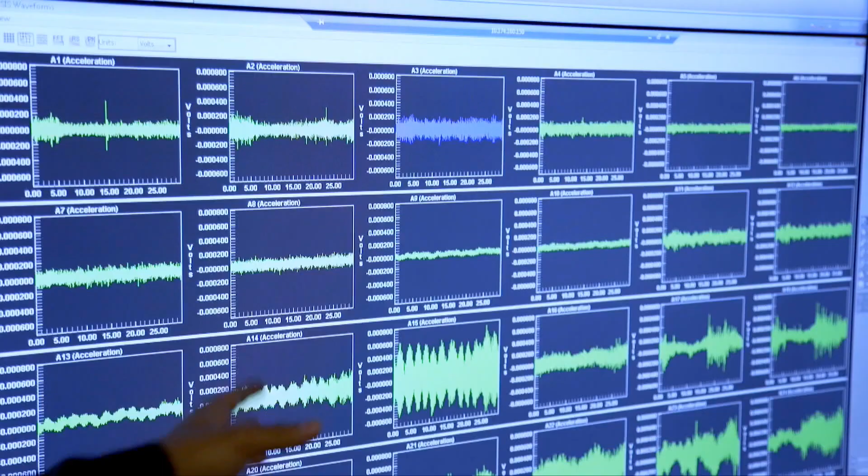Yes, the system has the capability to convert this into millimeters. Currently, although it's a bit windy outside, you can see there are spikes here, and that is in microns, so it is hardly moving a portion of a millimeter. The building is that stable. Due to wind, the building can tolerate a building movement of approximately 2 meters in any direction.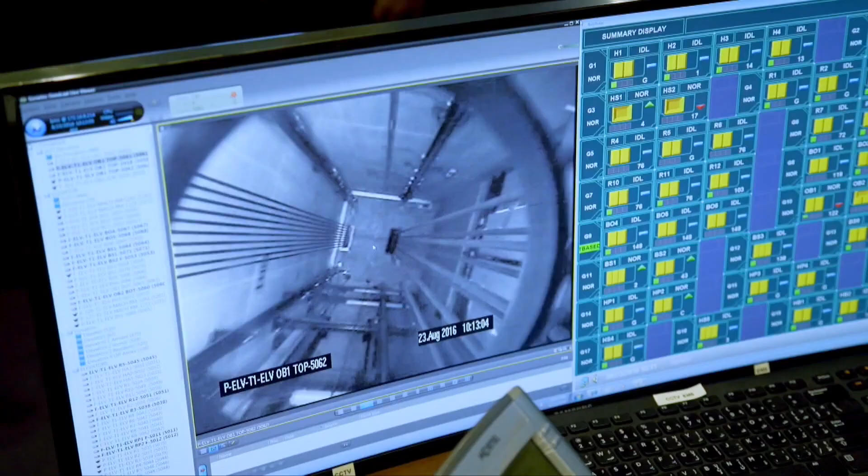Building a skyscraper over 800 meters high that can guarantee the comfort and safety of its occupants is a technological achievement. Its designers had to find solutions to problems that up to that point had only been theoretical. When you're designing these very tall towers, the main load you have to contend with is wind. It's not dead load, which is the weight of the building. It's not live load, which is the load of the people in the building and the furniture they put in.

What people don't realize is when wind goes past an object, and if that pulsing matches the natural harmonics of the building, you can get quite large forces. One of our goals of shaping the building was to get the shape which confuses the wind. And the shape of the building, at the bottom, you'll be going into 3 wings, and by the time you get to the top, it morphs into a nose, like the front of a boat. And through this shaping, the wind forces went way, way, way down.

The unique layout of the Burj Khalifa allows it to divert wind. But in structures with more classical shapes, there is another way to resist movement, even from earthquakes. To limit oscillation, these skyscrapers have dampers whose principle is simple. It's a mass that moves mechanically to the frequency of the tower with a certain time delay, thus helping to stabilize the building. There are different kinds of dampers.

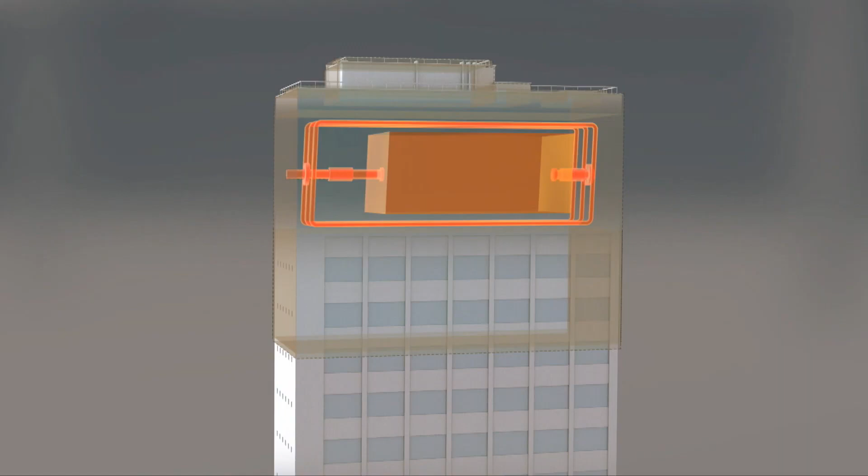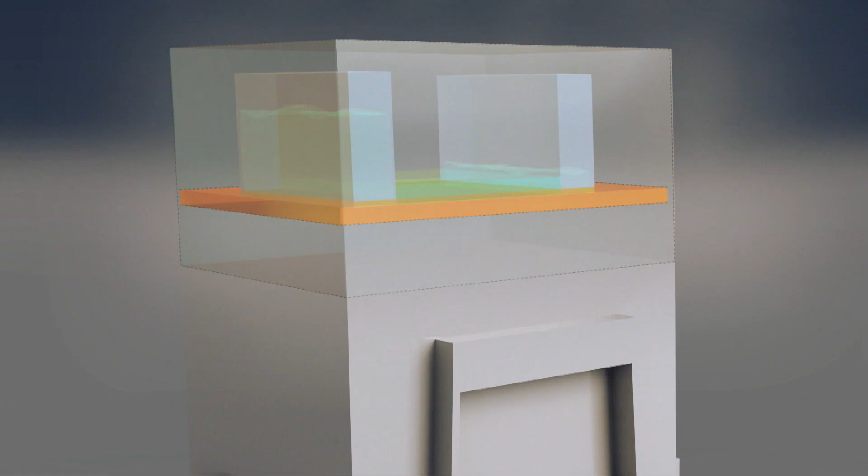Some are made from an enormous concrete block which must weigh at least 1/100th the mass of the building, placed at the top of the tower on a layer of oil and connected to the walls by springs. The mass follows the movement of the building, but with a delay due to the oil. In the case of the Comcast Center in Philadelphia, there is a hydraulic damper containing 1,100 tons of water that moves from one reservoir to another thanks to a motion sensor.

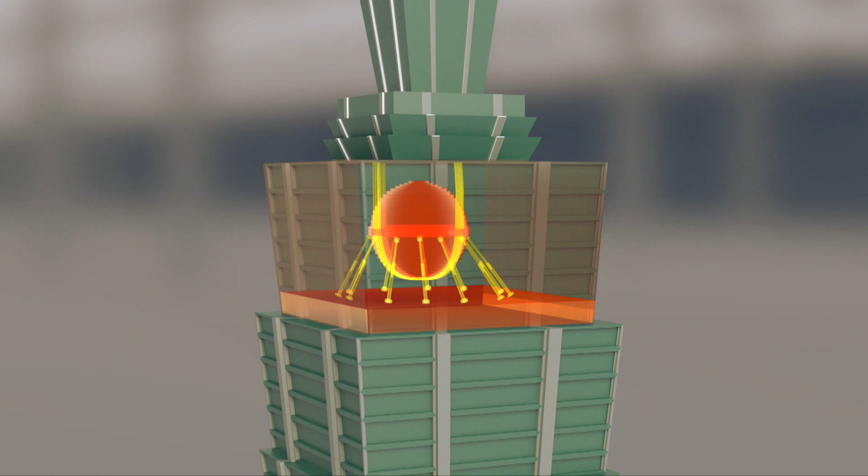But one of the most surprising dampers is found at Taipei 101 in Taiwan, a 508-meter-high tower located in a seismic zone. It's a gigantic steel pendulum measuring 5.5 meters in diameter, weighing 660 tons, which can sway up to 1.5 meters, reducing the building's oscillation by 40%.

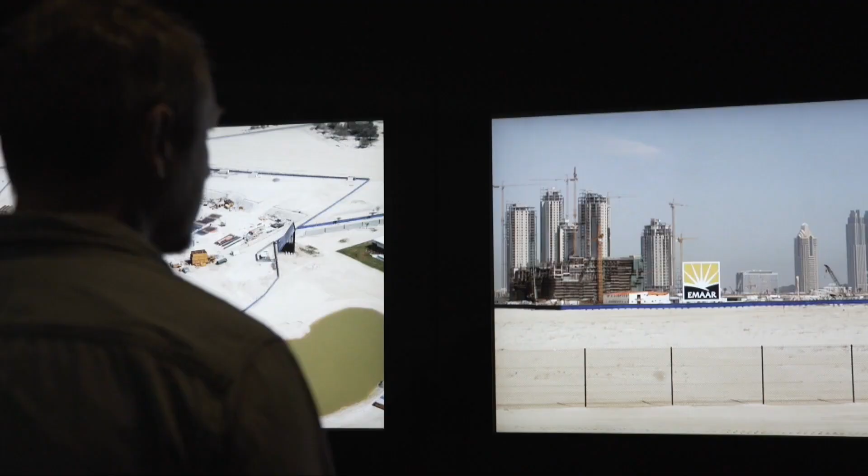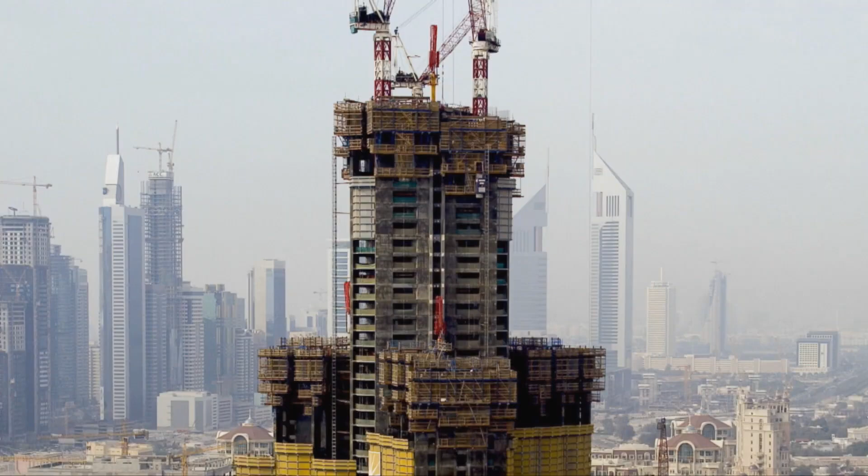The wind was not the only difficulty the Burj Khalifa had to overcome. With construction projects of this scope, even when they're extremely well thought out, there are always surprises in store. And the most unexpected sprung from an unlikely source, the building's own backers. The initial design was only 10 meters taller than the world's tallest building at the time, so it was only 518 meters tall. But during the design process, it grew by 310 meters. The structure was already up at 35 floors.

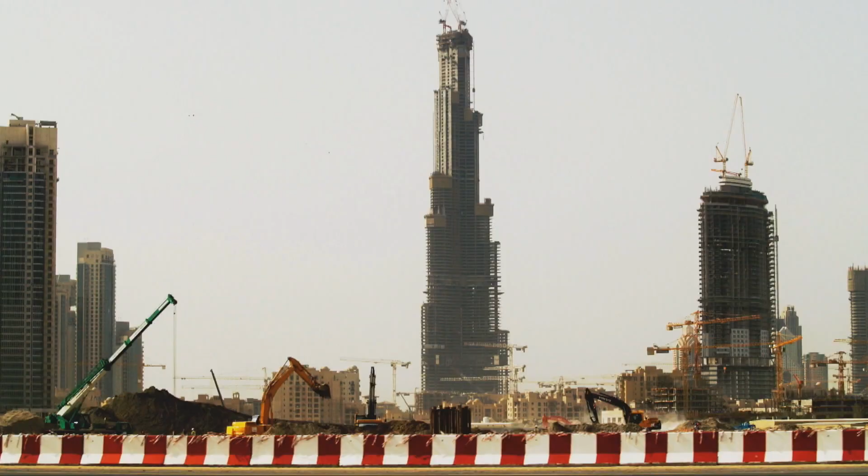The Emaar management heard that some other developers in the area were going to build another tower that was going to be higher than 700 meters. So everything was kept very quiet, but they instructed us to raise the tower height to 820 meters. So we all came to the conclusion, yes, we can increase it to 820 meters. So the design was changed, and from that period, we went on and finished the tower at 820 meters.

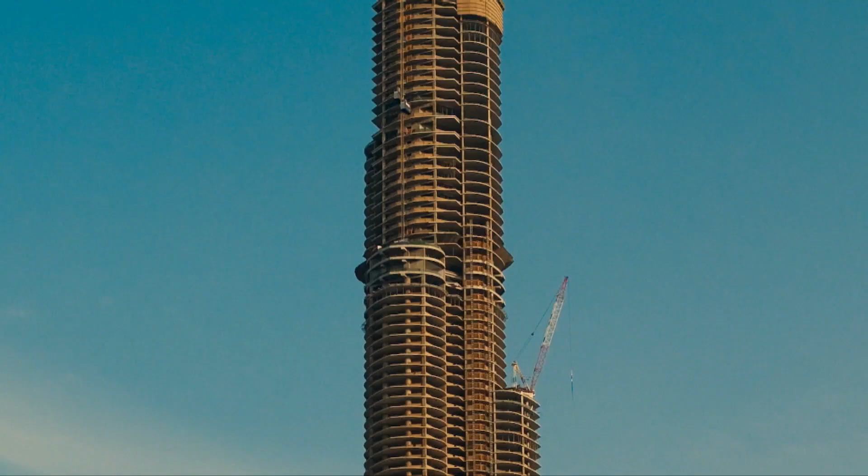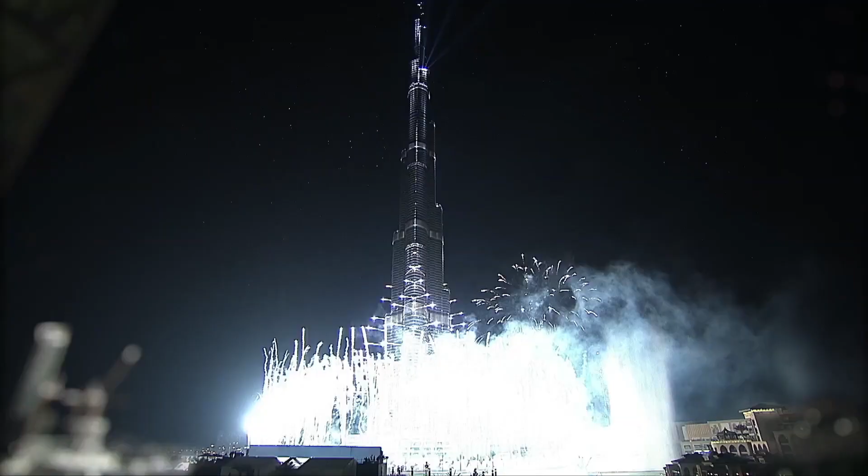On January 4th, 2010, Dubai revealed a secret that had been fiercely guarded until then, that the Burj Khalifa's final height would be 828 meters. They celebrated the achievement with a spectacular inauguration. Everybody involved was very proud, and I can say, a large measure of relief. Yeah, it's like, there's a big burden taken off your shoulders. You can say, wow, I can relax now it's finished.

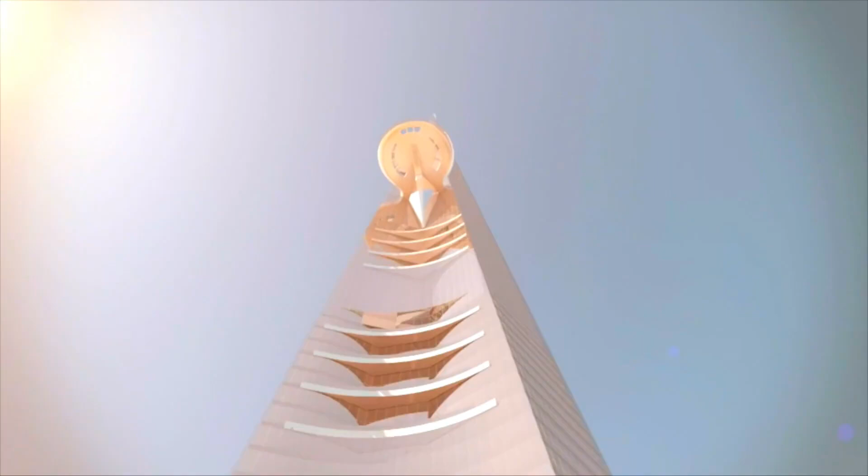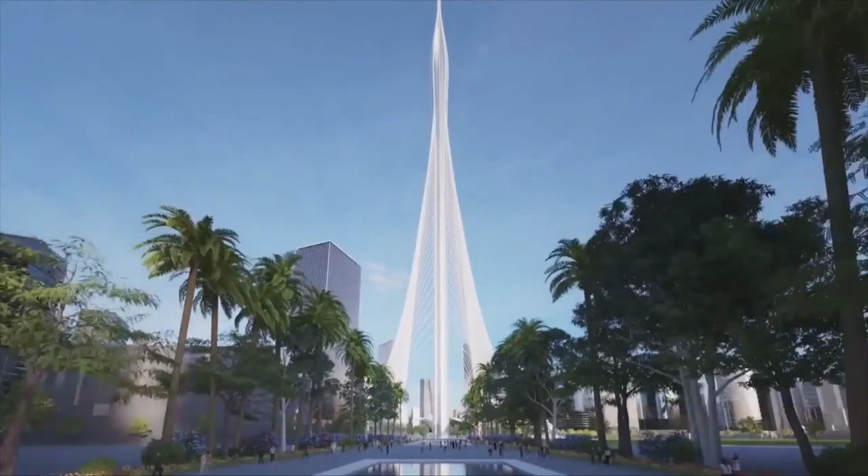Burj Khalifa is a skyscraper that has beaten all the records. But if it holds the title of highest building in the world for the moment, this will no doubt one day be stolen by another building. Already, the Kingdom Tower, which is expected to reach 1 kilometer, is under construction in Jeddah, Saudi Arabia. And if man strives to reach even greater heights, will there be physical constraints? Insurmountable limits? The only limit on height, until we get to almost unimaginable heights, like several miles, stratosphere, is financial. There is no technological limit to height.

The quest for height means ego and attention. Mankind has this desire to go to the next level, to push the limit. And the quest for the world's tallest building has always been a part of that. When you go hiking, you want to go to the top of the hill to see what's on the other side, you know? You're walking down the street, you want to see what's around the corner. And so this desire to go high is somehow in our mythology, it's in our culture. I mean, why go climb a mountain? Well, we do. It's just part of being human.

At the end of his journey through space and time, tracing the footsteps of those who set out to conquer height, Richard Taillé wonders. Since, over the centuries, science and engineering have allowed us to constantly push the boundaries of what's physically possible, will nothing be able to limit man's eternal longing to reach for the sky?